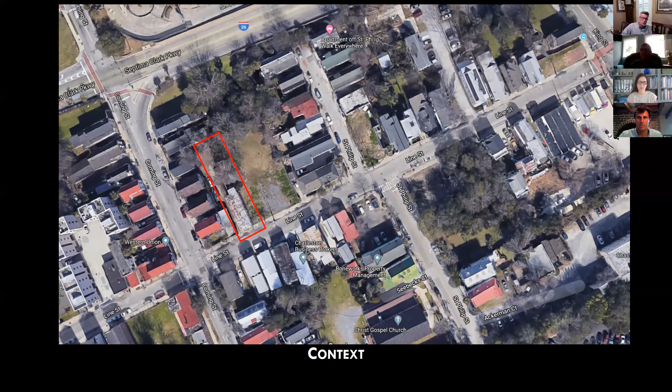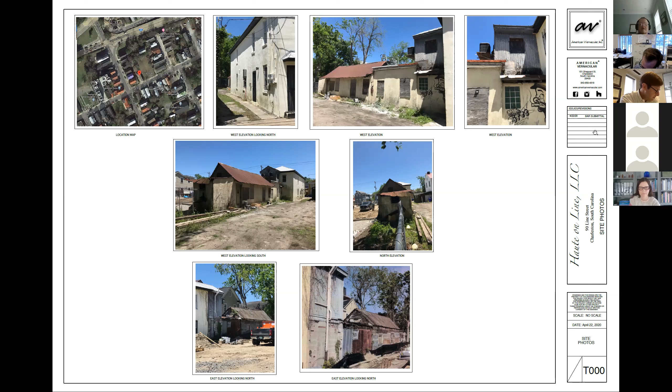And the engineer's report estimates no major salvage of materials in any structures if renovated. And the property is in the X flood zone, so it doesn't require any elevation. We're recommending retaining building C and approval of demolition of all the buildings except the original house on the street. We also require staff review on site with the owner and contractor to determine the extent of material removal of buildings to remain.

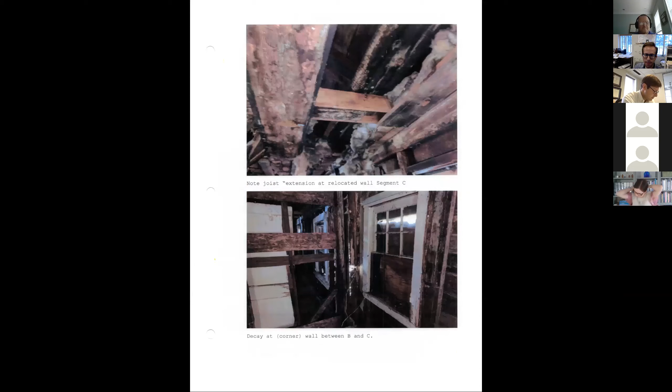Thank you. I had a hard time hearing most of it, unfortunately, I don't know whether it's me or what, but I think I got the gist of it. So if you don't mind, just repeating that last section. So I think what you said was that you recommend approval of demolition of every section except for C, which is that gable section, and obviously not the front house, which we're not asking for. And then staff review on site of how much of the material could be salvaged or not?

Yes, that's correct. Yeah, and so just back to section C again, because I do think that that's where we all are sort of focused, as well we should. You know, the salvageable material there has been greatly diminished by the fact that stucco was applied to the building. The original roofing material is not there, at least on the west side. On the east side, we could see that the old wood shingle was underneath that roofing material, which has been replaced. And so, I think, again, I'm just reacting to what you're saying, but while I would love to save that little building, I just don't think there's a lot in there that can be used or saved.

And maybe Russell might say something else to that as well. Well, again, I just don't know that by the time we do any sort of contemporary renovation that we'll have any true fabric remaining in the structure at the time the construction is done.

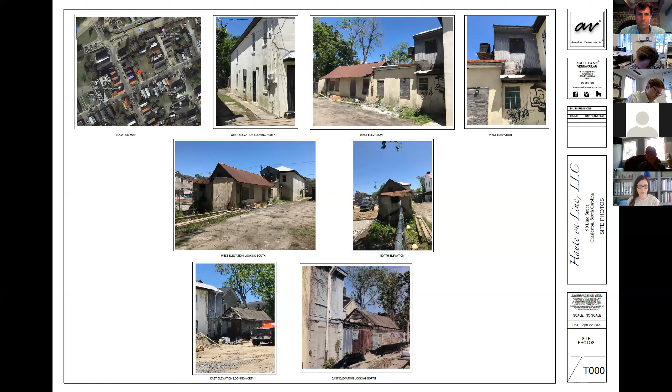I can go ahead and try to make a motion if that's okay. Go for it. Okay, I will make a motion for approval of demolition of the requested components except for what we're calling Building C, and the condition that staff meet on site and review with the owner contractor the extent of material removal of those buildings to remain.

Okay, so Julie's made a motion for approval of demolition of all requested components other than Building C, with a condition that staff meet on site to review the extent of the removed material. Did I capture that? Yes. Is there a second? Fillmore Wilson, I'll second. Seconded by Fillmore. Okay, I'm going to call the roll for the vote.

Julia? Yay in favor. Fillmore? Yay in favor. Glenn? Yay in favor. Bill? Yay in favor. Chair votes yay in favor, so the motion carries unanimously.

Next agenda item is 3 Legare Street.

This is a request for final approval for demolition of a brick wall along the driveway, demolition of a portion of the wall and iron fence at the street for a new pedestrian gate, and new garden hardscape. This is not rated in Charleston, circa 1944 to 51, in the old and historic district.

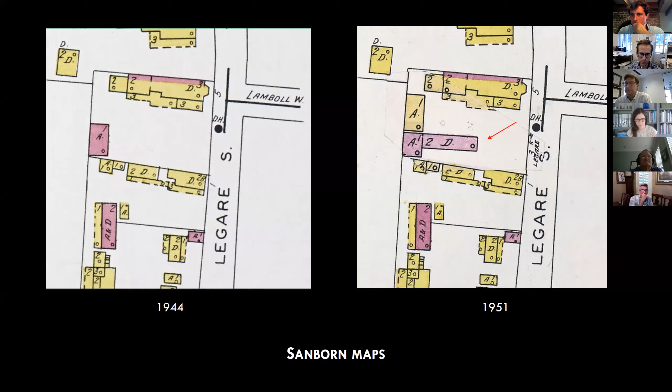And the Sanborn maps, pretty self-explanatory, between 44 and 51.

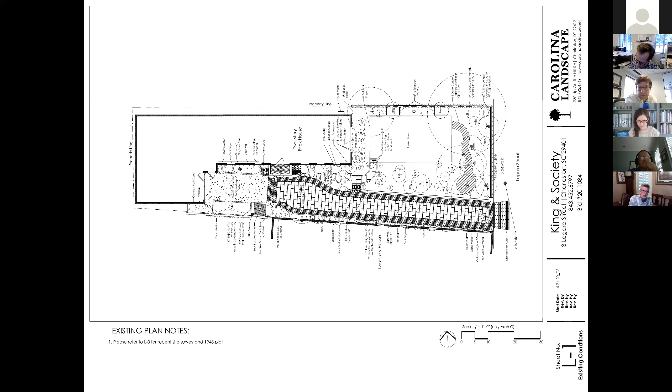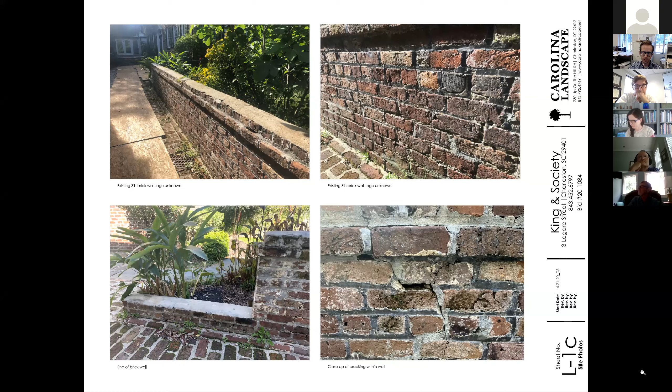You'll notice to the left, there is a raised planter, and then there's the neighboring wall. We would like to just extend the patio and finish it to be more modern and in character with the rest of the hardscapes we'd be using. But we would be keeping the structure that's existing there, just refinishing it. Next, please.

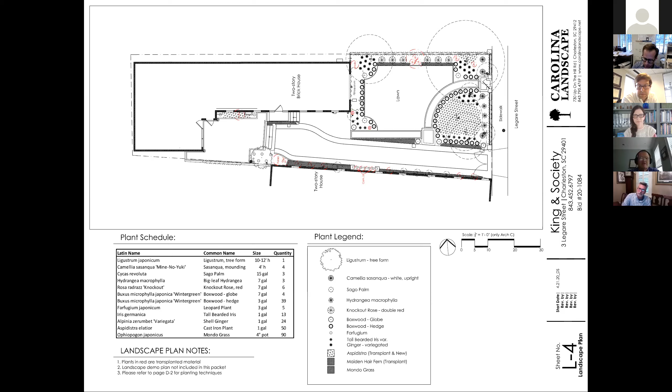There's a note about a 58-inch tall support structure. Yeah, oh, that is just wrought iron. There's nothing growing on it right now. I don't have a picture of it. It's just like a hoop type situation. It's bare right now. And you're proposing to remove that? Correct.

Okay. But we don't know what it looks like or how old it is. I think it was probably, when you look at it, it looks like it's more of a homeowner's decision to put that in, not that it's supported with a structure with like a concrete base or anything like that. And I could send a follow-up photo of it.

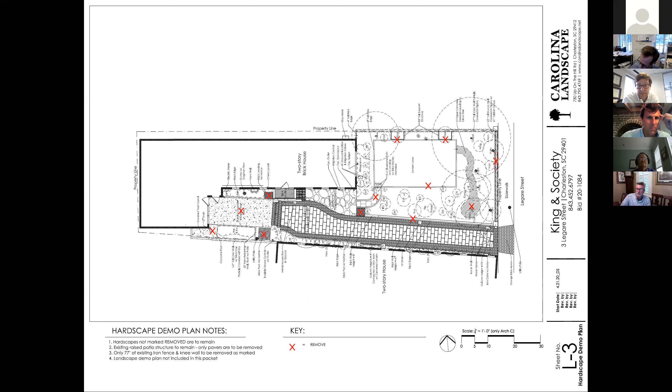Dennis, it's Glenn. I feel like it may have been visible in one of the site photos looking north, perhaps. Is that it down on the bottom right? No, that is the arch that's along the driveway, which we would be keeping. Okay, sorry.

Fillmore Wilson, I have a quick question. In the close-up photos of the ironwork, where you show one where the rail is detached from the post, is that the point that you would remove that section? Yes, exactly. That is the actual one of the sides that we'd be looking at removing.

It's not even. And so does your masonry column go back in that location? Yes. Okay, so you would lose that post as well. I would try potentially. Okay, but we could just, yeah. Is there a corresponding post at the other end of the opening, or does the fence simply

Separate there and attach to the new masonry column? No, currently there are two posts, and so it's that section that. And so the masonry columns, just looking at the elevation drawing of the new gate, it looks like the masonry columns replace those posts. Correct. Okay, thank you.

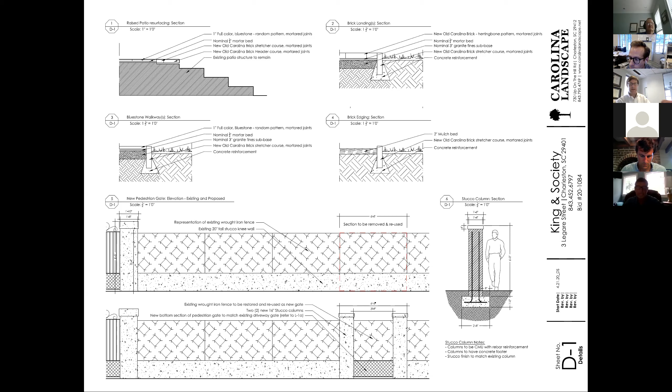Okay, and this is a request for final approval for modification to garden hardscape to include replacement of ironwork at the entry, fencing, and gate, and new lighting. It's category 3 in Charleston, circa 1797, 1840, in the old and historic district.

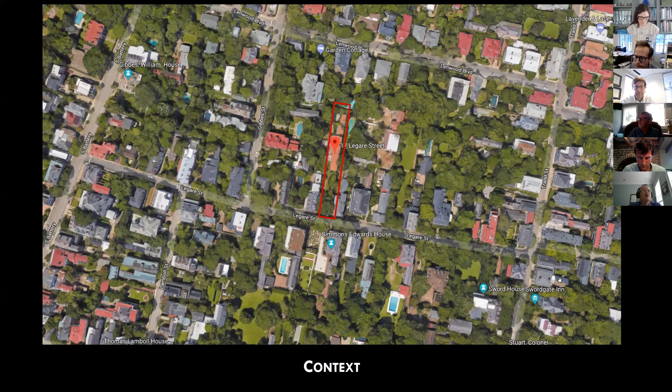Okay, so the overview here on Legare between Gibbes and Tradd, very deep property. This is a view looking from Legare right at the house in question. And then looking south on Legare with the house on the right.

There we go. Looking north on Legare, and the property's on our left in the shot.

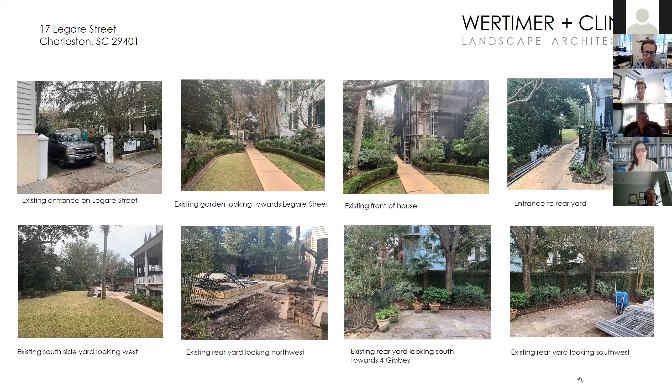These are photos of the existing entry sequence, existing stucco columns and wrought iron fencing. This is just showing the existing conditions of the site and the garden that is there presently.

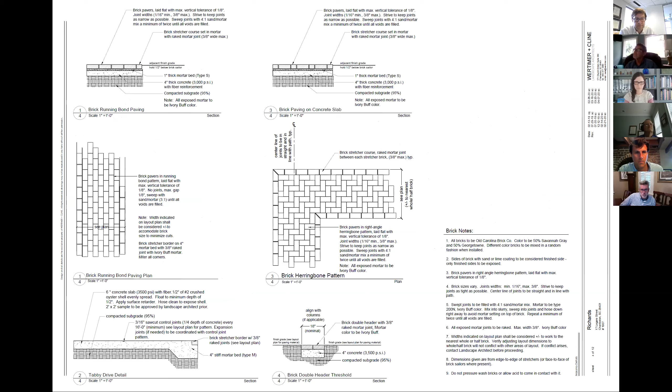These are our proposed masonry details showing the brick we're proposing, which would be Old Carolina brick. These are stone paving details, which would be towards the rear of the property. This is the proposed stucco wall that is on the north side of the property near the parking area.

This elevation shows what we are proposing for the new entry sequence at Legare Street. The existing stucco columns are 5'6", and we're proposing to raise them to 7'4", to match the existing column on the northeast side of the property, shown on the right and in the detail on the lower portion of this plan.

So the fencing would be new with similar vocabulary to what is existing now.

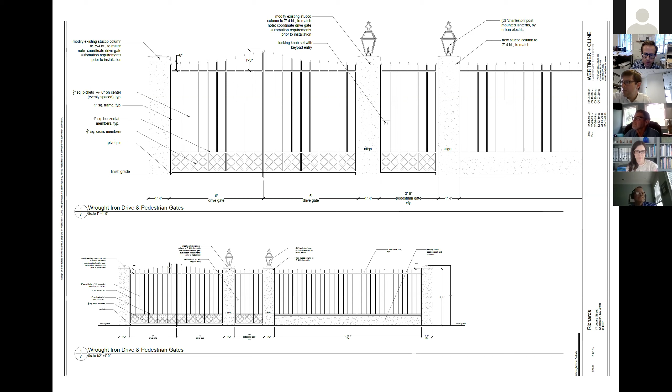Okay, and then the last question, where do the step lights occur? We don't have any step lights on the plan. Oh, the middle detail on the top? Yeah, that is just a light at the pedestrian gate that's going to be to the left of the piazza. Right there. Okay.

So how's that mounted? Where is it? I'm sorry, how is it mounted, where is it? That would be mounted to the existing columns that are adjacent, flanking that gate. Okay, thank you.

All right, so if we have no more questions, Alex, can we go to public comment? Yes, we have 1 person from the public signed up to speak.

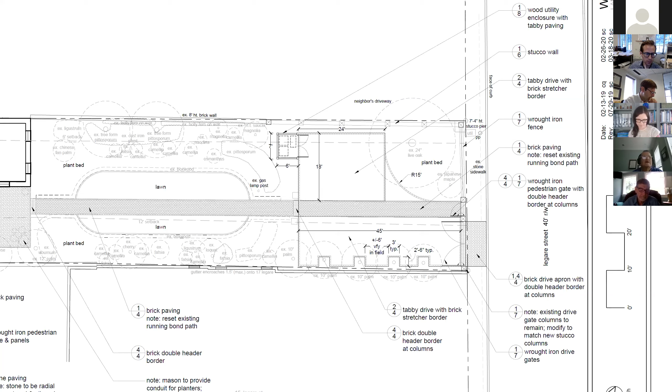Eliminate all uplights on all but grand trees. Uplighting of the live oaks at the rear of the property, however, is acceptable. The other hardscape modifications are acceptable, although any change to the right-of-way needs to be approved by the city. You've got that drive apron there, I think you're in the right-of-way. We're recommending final approval with staff conditions and final review by staff.

Okay. Cheryl, if you want to respond to any public or staff comments, you may.

Okay, sure. Alex, would you mind going to the overall site plan in the driveway area we were just looking at? So the proposed driveway is essentially the extent of it from Legare Street towards the interior of the lot. That's almost exactly the same length as the existing driveway is now. So what we were hoping to do was not encroach too much more into the existing garden. Also, where the driveway meets that brick path that is central to the garden, there are 2 existing brick columns that we were hoping to retain. So if we shifted the driveway further west, we would have to demo those. So that was one concern we had when we were placing the driveway.

As far as the trash enclosure is concerned, we can certainly flip it, it would work per plan. What we were hoping to do was keep it out of the way of that large live oak that's at that front corner. And also we thought that we could provide a little bit more screening with planting at the front side of the property where the wrought iron fencing is, since that is a little bit more transparent.

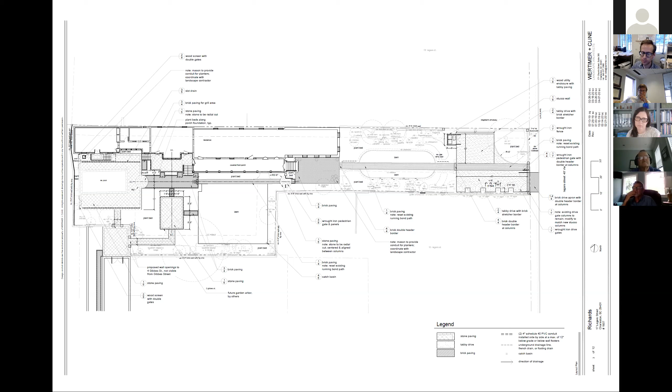Okay, thank you. So we'll go to board discussion. This is Bill.

I concur with staff's comments, but with the exception of the drive court, in light of the applicant's clarifying comments, I do believe retention of those existing columns and configuration of the existing garden panels, etc., should be retained. Otherwise, I'm in agreement with staff's comments and recommendation.

Mr. Chairman, can I just say one thing?

I would ask the applicant if it's possible, if you mirror the trash, to be in the drive area, or could the drive area get narrower to allow it to be on the east side of the drive without having to move the drive to the west?

Okay, and so we have the parking area. The intent was that you would be able to come in from Legare Street and park facing north, and the 24 feet would be comfortable for 2 cars. That was why we were considering that dimension, but we could probably narrow it some so that if we did flip the trash enclosure, we could get away from that live oak a little bit more.

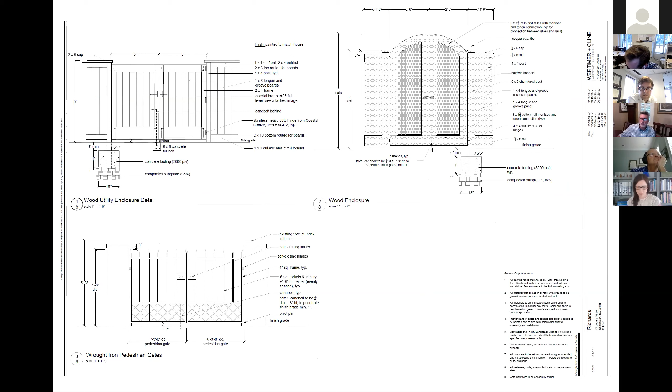My only comments would be about the trash enclosure. I think you're going to see the front or the back of it, and I'm sure the doors won't be left hanging open at this property. So I'm fine with either way, and a part of me likes it further from the street so that it is going to be shielded by landscape.

And I have to make a comment about lighting. This is such a massive, expansive property, and I don't think the public would ever have any idea if some of those subtle, sophisticated light fixtures were located at the back of the property. Personally, I wouldn't mind some of them, a modest amount, being located on the long pedestrian pathway to the house.

This is an issue of consistency though, Julia, because we have denied other people the ability to do that, and that's something we face all the time—people come in and say 'you allowed it here, why can't I do it?' We're just trying to be consistent and enforce the policies of the board. But as far as I know, it's not a policy per se, and I know it just gets ignored a lot of times, so I'm voicing a concern about that issue in general. I know that sometimes when we try to deny it, it happens anyway, and it seems like it's worth considering a little evolution of our position on that issue.

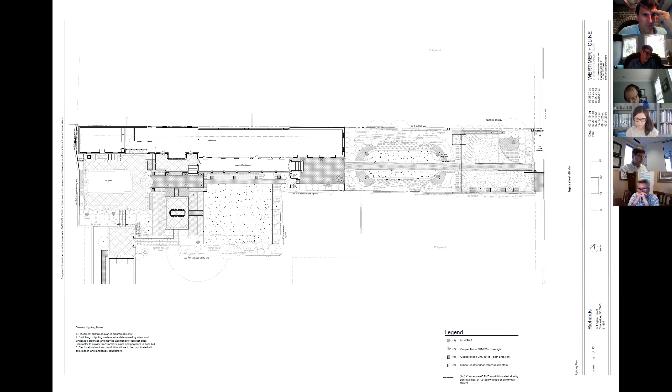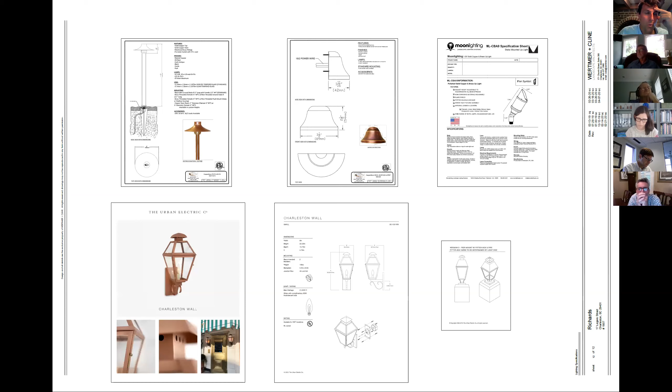Julia, I agree with you in that in this particular case, on a property of this size, I think their fixtures are appropriate and still subtle, and everything appears to be high quality. So my request would be that they get back to the city from their consultant a wattage diagram paired on the lighting plan. Perhaps they add the wattage equivalent, and I presume most of this is LED at this point, but they should add it to the plan to make sure Dennis doesn't think any of it is overkill.

Okay, Jay, if I may return to my motion and add a third board condition to provide a wattage plan to correspond to the lighting plan for staff review and final review by staff.

So just for my clarity, when we're reviewing this, you've approved all the lights that are shown, you're just asking for wattage, right? Yes, is that correct? Okay, correct. I don't think they have any hanging tree lights or anything unusual. I think she mentioned lights in the trees. Did I miss something? I don't see any fixture related to that.

Cheryl? Yeah, may I speak? Sure, please. Yeah, okay, no, I misspoke before. We don't have any fixtures that are hanging from the trees.

Thank you. Okay, all right, so Julia, let me make sure I heard you correctly. You made a motion for final approval with staff conditions 4 and 7, and board conditions to clarify the condition of the southernmost pier to avoid an impact to 15 Legare. Board condition 2, to paint the trash enclosure a recessive color to blend with the landscape. And board condition 3, to provide a wattage diagram corresponding to the lighting plan that shows a wattage equivalent with final review by staff. Correct.

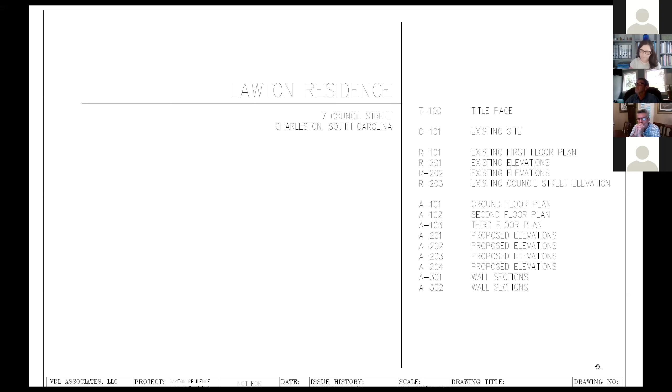Back in January 2018, we proposed raising the existing finished floor from 7 feet above mean sea level to 11 feet above. FEMA requires 13 plus the city's 1 foot. Now, 2.5 years later and with continued flooding, the owner wants to raise it up to the FEMA level, which I can't argue with much. So we're going from 7 feet up to 14 feet, 7 feet higher. This means we have 3 more feet of vertical stairs in this scheme.

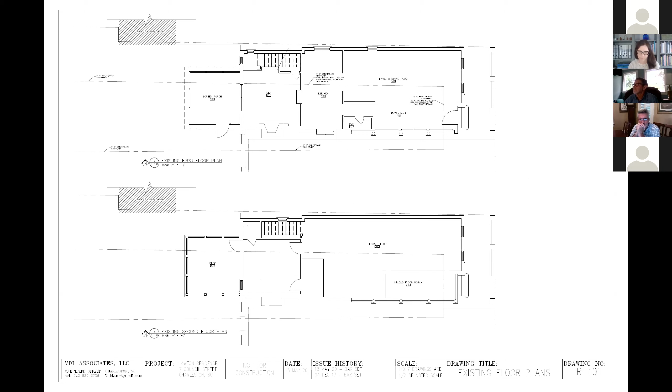These are the existing drawings, and at the top you'll see how the stairs come in, and we labeled it as an entry hall. I should have had the hall down by the powder room to the left a bit, because that's all living space, but we would turn it into a bit of a hall with our proposal. Next slide please.

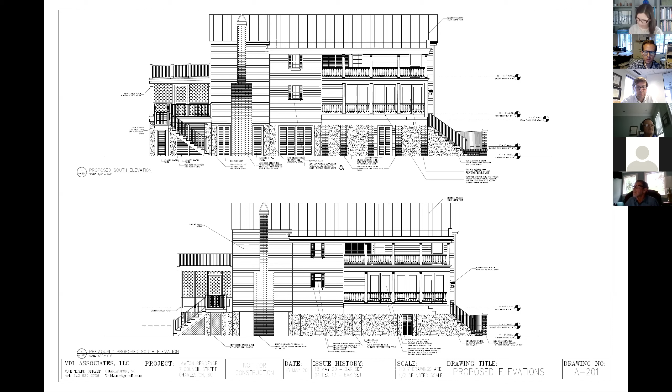Virginia, could you explain in the foundation plan how the piers under the piazza are not aligned for some reason? I was just wondering what that was for. The A100, I think. Oh, because the house isn't, it was added on three times. I mean, just under the piazza. Alex, are you able to get to that plan? It's A100. You said that, yeah. Why under the piazza are those 3 central piers proud of the 2 at the end? I just was trying to figure that out. Hunter, correct me if I'm wrong, that's the way that it is now.

Correct, that's the current situation. It just bumps out. I don't quite know why. Like I said, it was added on clearly at least 3 times and maybe 4, and I think that's when they moved that footing and the building.

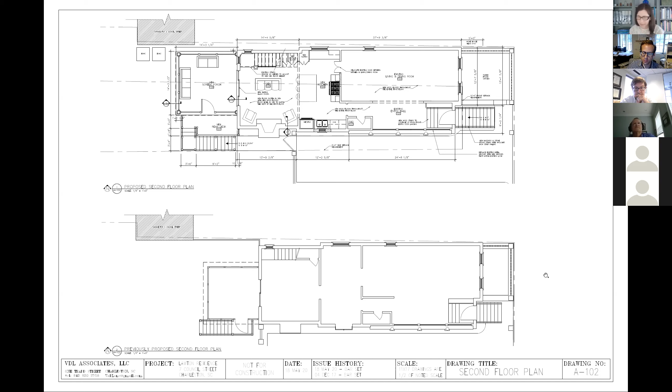But the columns above at the piazza are in alignment? Well, if you look at A102 or R100, that corner, you've got the 3 columns and then that weird corner and it recesses there to the north, the existing. I think, Hunter, speaking to answer that question too, it has to do with the brick piers that are currently there, which bump out. So we just followed that footprint. Okay, so those 3 columns are actually proud, correct. There's a photo, Julia, where you can see that.

Doesn't quite show it, but okay, we trust you're following the existing building, yeah.

And my other question was, can you just explain the purpose or the need of the deck that's outside of the screen porch? We've worked on this a good bit, Julia. The screen porch is the size of the old one, but this is the back, this is the only back door that's getting there. So if you're going in the back door and coming from your driveway, that's how you get into the kitchen. If we were to push the stairs all the way next to the screen porch, they'd have to enter from the rear of the property, which is a full 15 more feet to walk, turn around, and walk up the stairs. That was the purpose of that. Did that answer it? Okay, thank you.

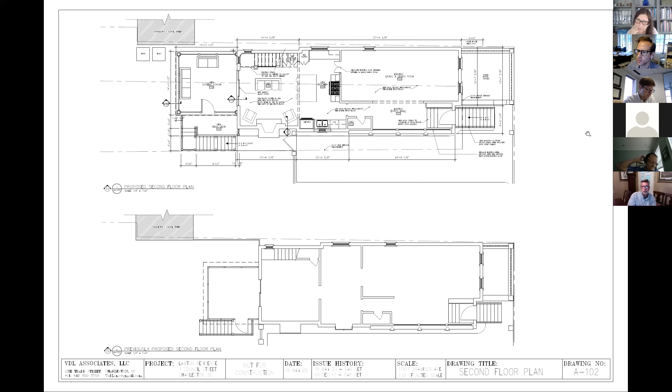Can you hear me? Yes. I was just going to mention, and then Alex, you can read the comments. It could be a variance, even if exceeding the 50% value rule, and stay with their previous proposal, and we can assist with that process if that is preferred. Alex, why don't you go ahead and read the rest of the comments, because I'm afraid I'm going to cut out here. Okay.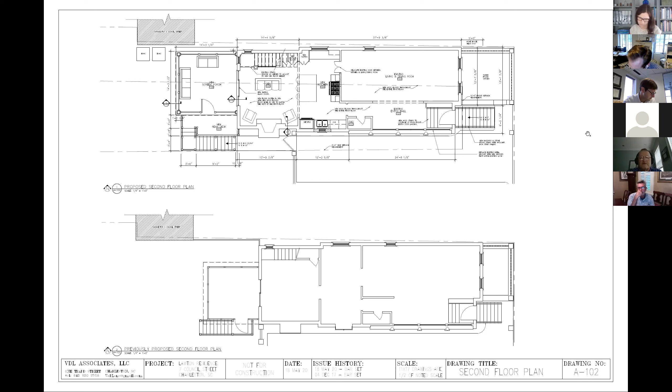The previous request was to elevate to finished floor 11 per the preliminary flood maps. This request is to elevate to finished floor 14 per the current flood maps. This changes the proportions and presents a new challenge of accommodating the entry stairs. This request also calls for the house to be set back an additional 5 feet, which changes the relationship to the streetscape and historic placement of the house on the site. However, setbacks on this street are inconsistent, and staff feels that this is acceptable to avoid a convoluted stair layout.

The stair to the new rear deck screen porch should be inset from the south facade, as it was in the previous submission, or relocated to the rear.

The elevation to finished floor results in the deck being elevated an additional 3 feet from the previous proposal, but the deck exists currently, albeit at a lower elevation. Eliminate the door in the foundation on the south elevation below the piazza. Staff is recommending preliminary approval, not enough detail information, with conditions and final review by staff.

Provide details of all new conditions.

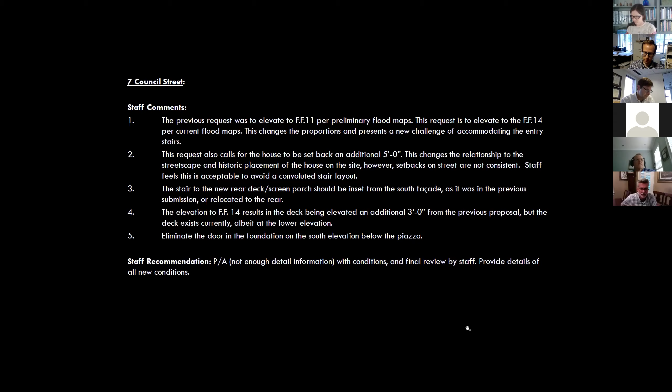Okay, thank you, we'll go to board discussion then. This is Bill. I agree with staff's comments and recommendations, and I appreciate the comments from the Preservation Society regarding detailing of the stucco foundation. I believe that can be part of the final review by staff, so I agree with staff's comments and recommendation.

Fillmore here, I agree with Bill and staff. Any other thoughts from the board? I agree as well.

Okay, somebody want to offer up a motion? I'll make a motion for preliminary approval with staff conditions noted and final review by staff. Okay, simple enough, Fillmore's made a motion. Is there a second? Second, Bill Huey. Second by Bill, all right, I'll call the roll.

Fillmore, yay. Approve, in favor, whatever our appropriate language is there. Bill, yay, in favor. Julia, yay, in favor. Glenn, yay, in favor. Chair votes yay, in favor. The motion passes unanimously. Thank you all very much. Thank you, guys.

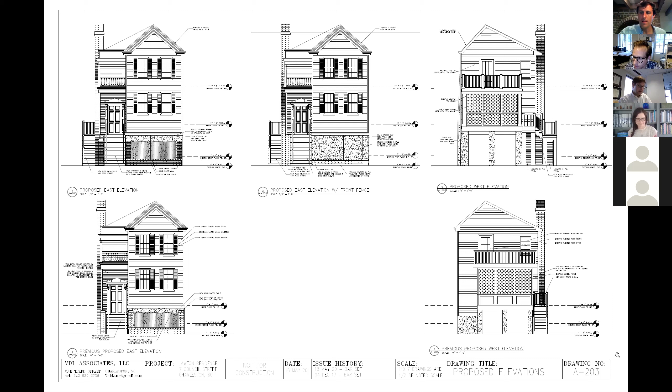Okay, next agenda item is 95 Bogard.

95 Bogard Street, requesting conceptual approval for new construction of an addition. It's category 4 in Cannonborough-Elliottborough, circa 1890s, in the old city district. Next, please.

Go ahead, Alex, it's real slow for me. Here's a context photo and aerial of the site near the corner of Bogard and Ashley. Existing site photo of the front, and showing the east side, an unusual situation where a single house form has a piazza on the east side. Context photos looking east on Bogard and looking west on Bogard.

This is the 1985 survey card. It notes the house as a tenement house modeled on the single house form with a window-door pattern of window, door, door, window, because there's no central hall. Sanborn maps from 1902 and 1944. I think this dates from, I think we said 1890s.

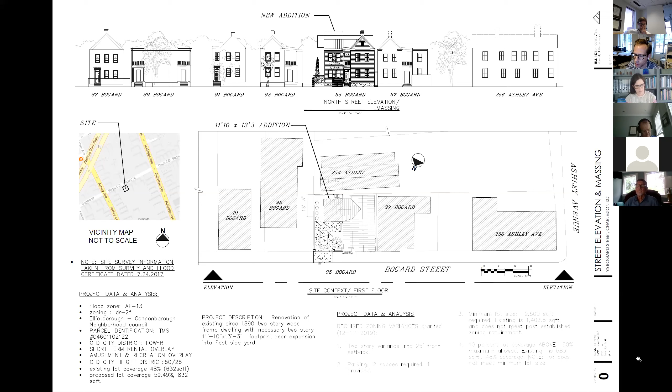I don't want to interrupt, but I think we lost one of our board members. I think we lost Glenn. Alex, I had finished anyway, if you want to throw it back to the board when you get him back. I'm here to answer any questions though. We can pause for a minute. Let's give Glenn a minute to come online, and then I'll ask him if there's any board questions you have.

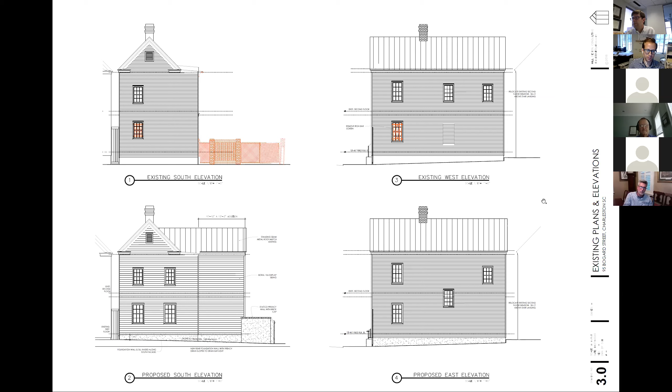Thank you, this is April Wood, Historic Charleston Foundation. Historic Charleston Foundation appreciates the effort of the applicant to rehabilitate this historic structure. However, the proposed L addition needs additional refinement before we will support it for conceptual approval. The addition needs to be further differentiated from the historic structure so that it's clear this addition is not part of the original house. With so little historic fabric remaining on this building, it will be important to keep what fabric remains. The columns closest to the addition appear to be cut in half to adjoin to the addition. It would be preferred if the columns could be retained as whole units and the addition added adjacent to the columns. HCF recommends deferral so these issues can be addressed. Thank you.

Okay, and our next speaker is Anna Catherine Carroll. You can unmute yourself. Thank you, Anna Catherine Carroll with the Preservation Society of Charleston. The Preservation Society is generally comfortable with this approach given the unique lot constraints. However, we would ask that the addition be better differentiated from the main house, primarily by lowering the height of the roof. We feel this would be best achieved by foregoing the gable roof form for a flat or hipped roof. A successful example can be seen at 53 Logan Street, a gable roofed house which features an L-shaped addition with a parapet roof line. Thank you.

Okay, Alex or Dennis, staff comments, staff recommendations?

The proposed 2-story side addition is not subordinate in scale or mass and overwhelms the existing small single house form. A more sensitive 1-story side addition may be more appropriate considering the constraints of the lot.

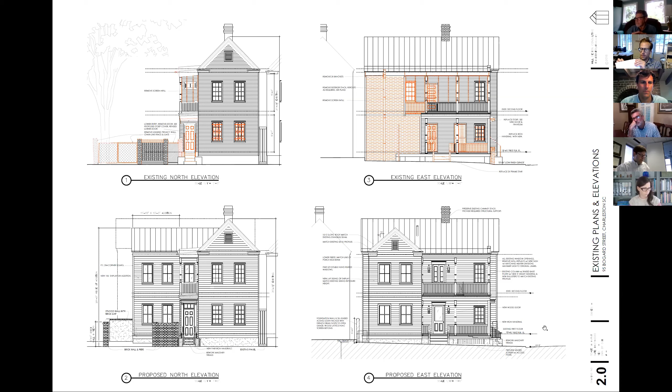Okay. Next agenda item is 34 Rose.

All right, this is a request for conceptual approval for new construction of a single-family residence in Cannonborough-Elliottborough, in the old city district. Next, please, Alex.

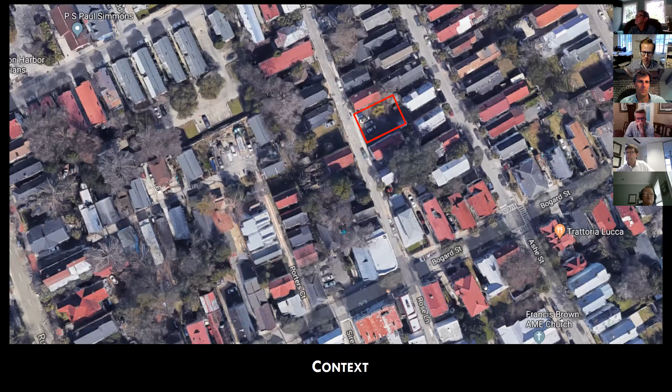And why don't you go through these, Alex? This is an aerial photo of the site showing the empty lot at 34 Rose Lane. Another aerial view. This was previously at the board on February 27th of this year, where it received conceptual approval with staff conditions.

Staff conditions 1, 2, 3, 6, 7, 9, 11, and 13, and a board condition to lower secondary eave lines below the main gable and eliminate the north dormer. Board comments included positive changes, simplify elements, small items to change to make more appropriate, pull eave down below main gable, eliminate dormer. Another board member: good direction, I think that's reconfigure massing.

Yeah, width, not entirely out of context. And another board member said adjustments can make it fit in. And I will promote the applicant.

And Ashley, you can unmute yourself and turn on your camera if you'd like. All right, thank you, can everybody hear me? Yes. All right, I'm Ashley Jennings, I'm here tonight as the architect for 34 Rose Lane.

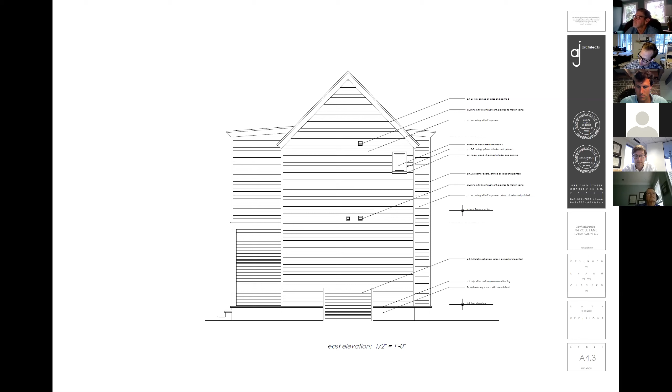This is just a comparison of the floor plans. As you can see in the evolution, version 2 to version 3, there's not much difference other than the fenestration.

Next slide, and once again, elevations, showing the differences in the elevations. Next slide. Elevations once again. Next slide.

And this is a streetscape just showing the building as proposed now in the streetscape. Once again, trying to lower that eave of the main building to bring it into scale, closer into scale with the streetscape.

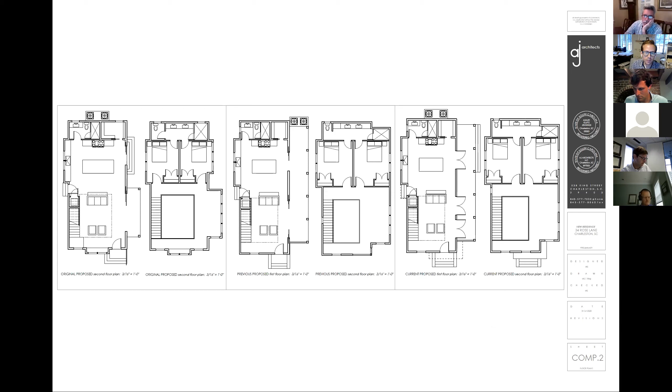That's a good question. I think that if we could successfully put a hand crimp seam metal roof there, we would. You could, Ashley, do a galvalume hand crimp, 26 gauge galvalume, and hand crimp it.

Okay, in this area. And I did ask too, because of that really low pitch on those side portions. Right. Yeah, the transition is important there.

Yeah, I think you'd almost be required to come up with more of a hand-seamed roof. I don't think that would take any other mechanical seam out of the equation at low pitch. Right.

I have one question, Ashley, that I might have asked before - forgive me, but can you explain the reasoning behind that door on the north side? I think that they wanted a side door to be able to handle trash, things like that. It's nice to have it. Thank you.

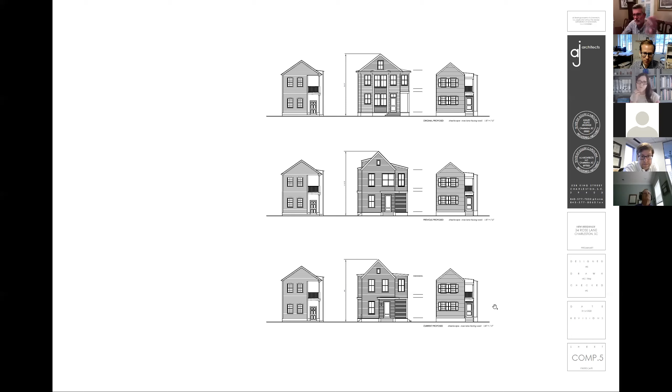Real quick, Alex, can you go to those elevations? You can go to the previous and current. Thank you. You're muted, Bill, if you're talking. Not sure if you are. Okay, I'm looking, I'm not talking. Sorry, okay, that's it.

Well, I can start if needed. I was going to thank the applicant for the summary she provided on the cover sheet - this is Julia, by the way. That's really helpful for me when I'm reviewing these things. And I'll reiterate, I've probably said it before, but I appreciate the relatively modest program of this house and the focus on graciousness and natural light, and a little bit of drama with that large opening in the second floor.

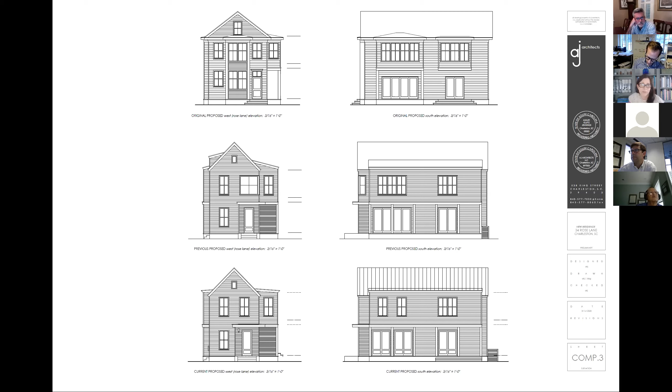I think the north side door is quite a departure from tradition, but if it's approved, I would just think it'd be nice to pull that little canopy in so that it's not wrapping around the adjacent bay, so that it's tucked into that space.

And I do feel like the evolution of this design, like Bill was looking at, it's definitely moved in a good direction. And I think at this point, in my mind, it's thoughtful without being a replica of something historic, but it can work well in the context. And to me, it's interesting and acceptable at this point.

Yeah, this is Bill. I agree with Julia. It doesn't - it says it's a new house, but it is sympathetic, which is something we were trying to look for in our previous comments. And I think a lot of effort has been made to address the comments.

Yeah, the north door is a little bit odd, and I guess I should have asked real quick to maybe check out the site plan one more time - I don't know if there was a fence or anything over on that side.

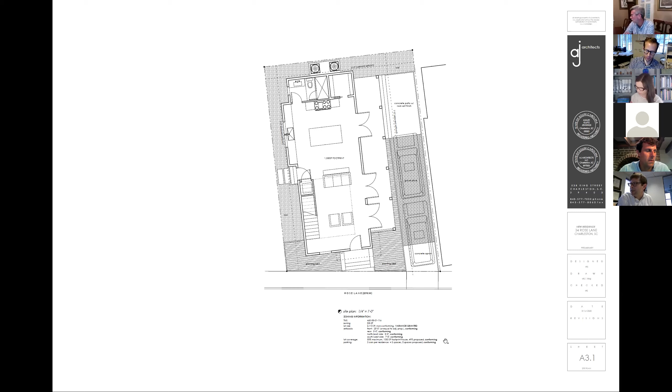So Dennis or Alex, I thought I saw we gave them conceptual approval with conditions or comments back in February. So this is seeking preliminary. Yes, this is preliminary.

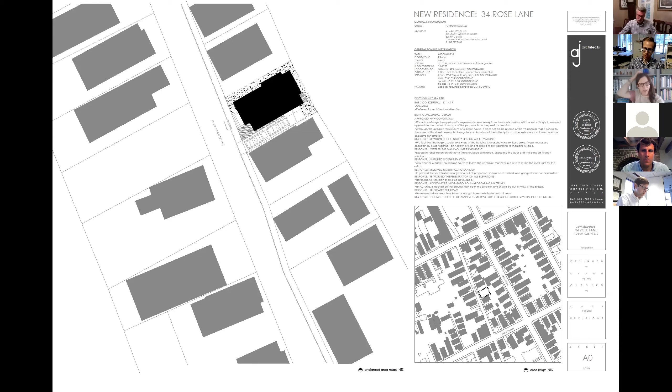Does anybody, Fillmore, unless you have any other thoughts, does anybody want to throw out a motion? Fillmore, do you want to talk? Sorry, I was muted.

No, I think I agree. I'm generally not crazy about windows muntined really tight together, but this is a new house, and it's clearly a modern house and a modern design. So I'm having less heartburn about the fenestration on the current design than I would on other ones. I agree with staff that it's a little massive for Rose Lane, but it's certainly not totally out of scale. So I think I'm in line with the rest of the board on this one.

I'd just like to ask other board members if anyone has strong feelings about the windows on the first floor being taller than the windows on the second floor. At the north side bay there's a kitchen, so those first floor windows are a good bit shorter than the ones above. But in general, at the front elevation, do you guys have any strong feelings on that point?

If this were a more traditional design, yes, I think the second floor windows should progress down, getting larger. But it's clearly a very contemporary design, and so I have a little less heartburn about it because of the nature of the design in general.

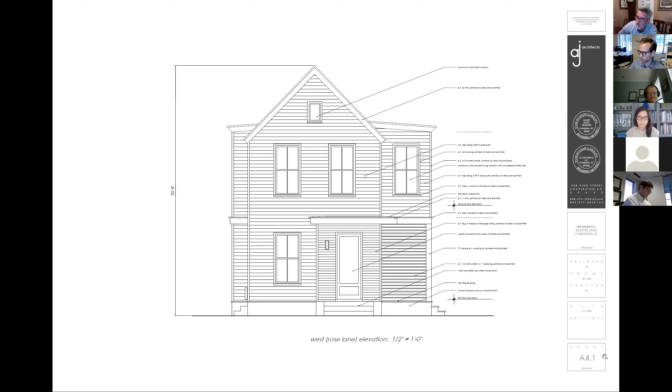Mr. Chairman, may I ask a question of Julia? Julia, I'm also now seeing those water heaters or whatever that is over there on the north side as well. I don't know the site condition, but would you entertain the idea of maybe a gate or something over there? Maybe Ashley can clarify this—is a gate warranted, or are we dealing with a gate in a void? I don't know that, but something to conceal those and maybe minimize the impact of that north door as well.

Sure. You're talking about the meters that are shown on that elevation? Yeah, the gas and electric meters is what it's called out as. I don't know where the water heaters go, but yeah, it is the gas and electric meters.

Let's add another staff condition. And I'm sorry, Julia, I guess maybe I should have asked Ashley, is a gate even possible over there? It's something we can ask.

Okay. I think that's reasonable to have a board condition to include a fence and a gate to screen the north side utility elements.

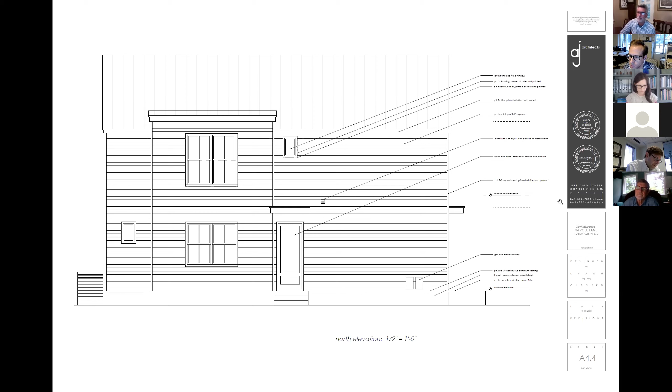And I will second whenever you call for it. Okay, so Julie's made a motion, Bill has seconded it. I'll call the vote. Julia, yay in favor. Bill, yay in favor. Fillmore, yay in favor. Yay in favor. Chair votes yay in favor, so the motion carries unanimously.

All right. Thank you. Thank you.

All right, next agenda item is 301 King Street. I think we lost Dennis during Julia's motion, so I'll go ahead and introduce. Ask for some lighting, I need someone to walk by. The light went out. I'll go ahead and introduce this one and we'll see if Dennis is able to join back in.

So this is 301 King Street, a request for appeal of staff denial for painting of existing unpainted masonry walls limited to the Liberty Street and rear elevations. The structure is not rated, is in no designated neighborhood, and the portion of this building in question was built between 1944 and 1951 and is in the old and historic district.

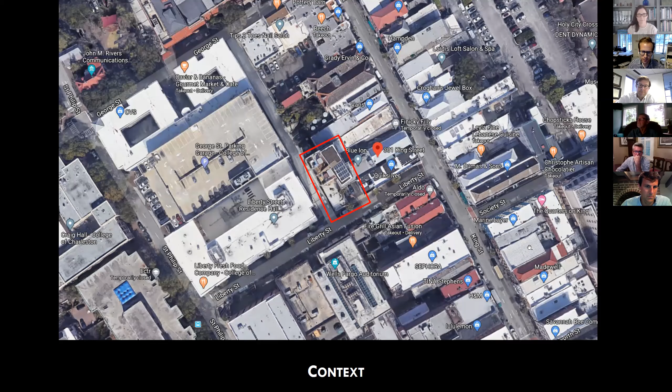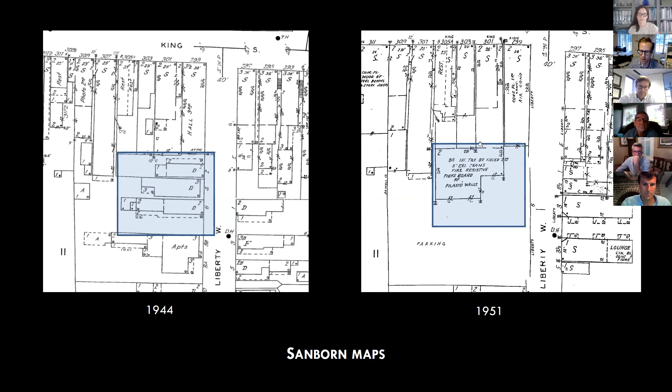Sanborn maps from 1944 and 1951 showing there was previously some houses here, and then in 1951, the building in question. And I'll find the applicant.

All right, I've promoted the applicant Matt Chambers and Rich Yesian, and you can unmute yourselves and turn on your cameras if you have one. Thanks, guys. This is Rich Yesian. I am one of the owners of the building 301.

Just a quick background, we purchased in 2007-ish. I am a co-owner with two other partners of Blue Ion, which is that second story of the older structure. That top addition, which is a condo, that is mine, that we built in 2015. That's my residence. And on the ground floor, of course, is Apple. So just some background on that building.

Alex, you did a great job of introducing it and showing the pictures. So the front part of this building, of the 2-story structure, is circa 1800s, whereas this rear part of this building, the one in question that we're looking to paint the brick of, is circa 1950s, when that was built.

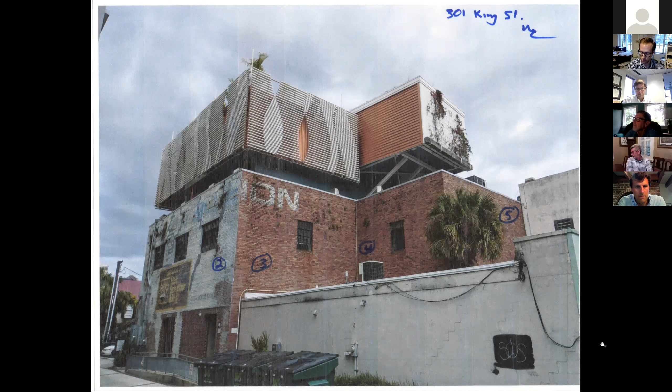Our main purpose really is to clean up the brick, seal it so that it doesn't deteriorate the building. We also feel that the brick itself is not historic in nature. It's also off of King Street and in this back alley area off of Liberty, and it's been painted before. So there's also graffiti on several sides of this brick that we'd like to cover up. So aside from the original purpose, we felt like it would upgrade the look of the property itself and the area that it's in by painting it.

I will also say that the approval of the condo that's sitting on top, my condo built in 2015, went to the BAR back in 2013 I believe, to get approval, and was overwhelmingly approved by BAR. Charleston Preservation Society and Historic Charleston were all on board with the design of the condo and the addition. One of the key things someone said, I believe on the BAR, was that the addition, being contemporary in design, was actually upgrading the overall aesthetics in that area, because there was nothing exemplary about the building itself and the surrounding buildings. And so they felt that contemporary design and new construction was actually improving all of that.

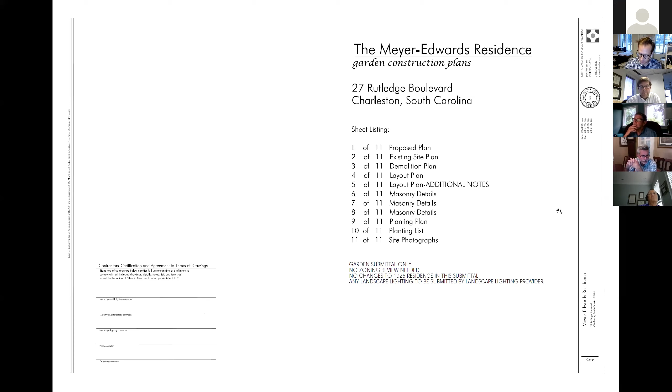We are requesting approval for a new rear garden and swimming pool with a limestone terrace around the pool. Due to past flooding, we studied the existing coping wall height and decided to slightly elevate the pool terrace to avoid floodwater in the pool, but the surrounding plant beds will all remain at the existing grade adjacent to neighboring properties. We are requesting to replace the existing iron gate with a wood gate for more privacy, as this garden is on a corner lot with high visibility.

The iron is not historic, and the stucco piers are CMU block with stucco finish. We would like to create a hidden bicycle area behind a stucco wall panel, where we need to remove the existing fence to gain access for pool construction. The submitted plan shows a gate from that bicycle area out to the sidewalk, but we are currently exploring other options to have that area open only internally to the garden. A mix of existing and new plantings will make the garden far less visible from Rutledge Boulevard.

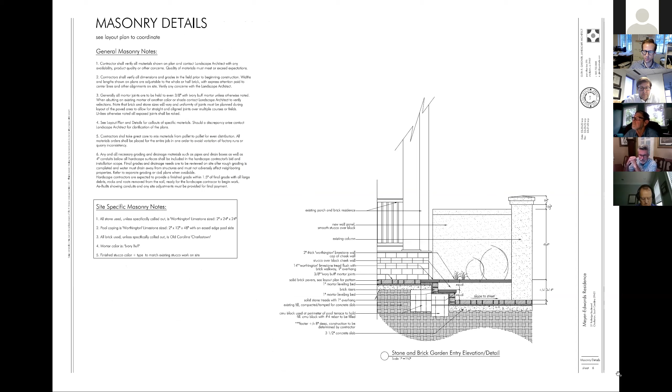The next slide. These are getting into our masonry details of how it would be built. The next slide.

These are more masonry details. This is a detail of a proposed wall panel that would be on axis with the wooden gateway, the access from Rutledge Boulevard, and the equipment for lighting and irrigation controls. We have planned for those to be on the back of it.

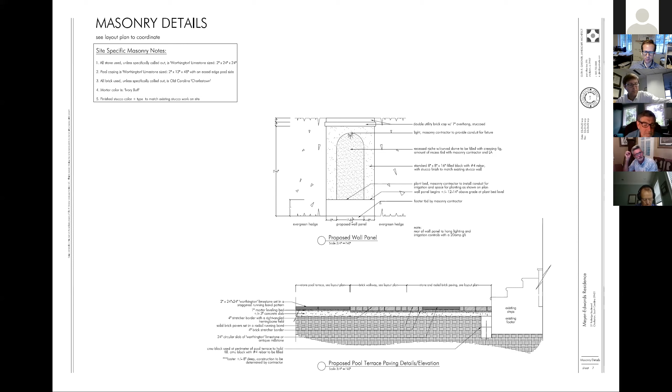Yes, where you're pointing, exactly. Yes.

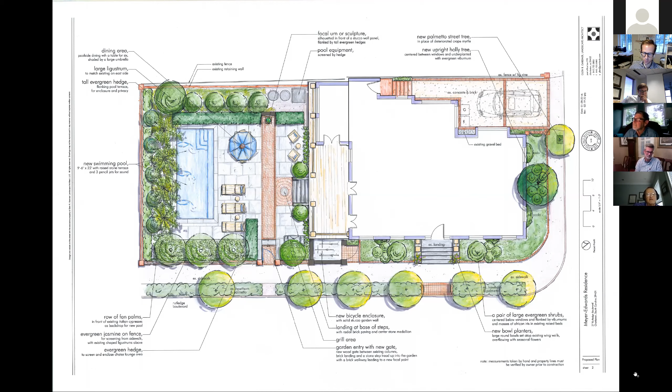Provide a permanent screen for the pool equipment and submit details. Provide details of any proposed landscape lighting if proposed. The other hardscape modifications are acceptable, although any changes to the right-of-way need to be approved by the city. We're recommending final approval with staff conditions and final review by staff.

Okay, thanks, Dennis. Elizabeth, you want to say anything in response to staff recommendations? We are already looking into having the bike storage location moved internally to the site, so that is totally doable. And the screening of the pool equipment hopefully would happen with the evergreen hedge. We were thinking the other sides also need to be screened from the neighbor's property. Okay, we can do that as well.

All right, thank you. So let's go to board discussion. This is Bill - I think it's a nice plan. I do agree with staff's comments, and I would support staff's comments and recommendation. This Fillmore, likewise. All right, Julie, any other thoughts?

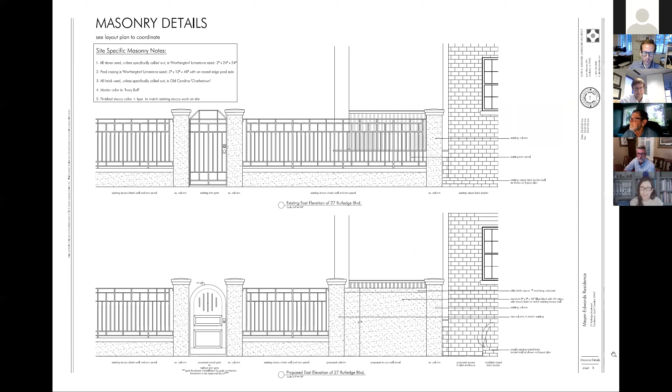No, I agree. And I just thought of a late breaking question for Elizabeth - I'm just curious, I see the trash and recycling bins just in the driveway. Is that just where they are now and that's how they deal with it? Yes, that is where they are now, just sitting there. I don't have anything else to add.

Someone want to make a motion? Okay, I'll make a motion for final approval with staff conditions and final review by staff. Okay, Julie's made a motion. Is there a second? This is Bill, I'll second. Okay, I'm going to call the roll.

Simple enough - Julie? Yay in favor. Bill? Yay in favor. Glenn is recused. Fillmore? Yay in favor. Chair votes yay in favor, so the motion passes unanimously.

All right, next agenda item is 50 Lawrence. This is requesting final approval for new garden hardscape, swimming pool, and wood gate. It's a category 3 at Ansonborough, circa 1807 to 1808, in the Old and Historic District. Next, please.

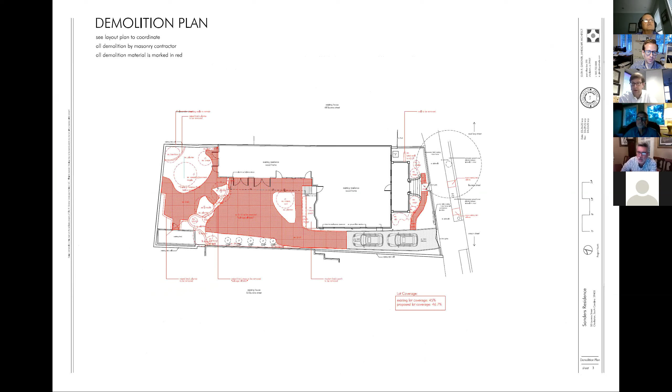Does anybody have questions for Elizabeth right now? Yeah, this is Bill. So Elizabeth, right now you mentioned the rear of the property is raised. And it looks like the rear part of the building still communicates to a raised grade. Where are the steps? I'm just making sure I'm reading this right.

Yeah, I was wondering in your new plan, is that grade raised in your new plan as well, all around the pool? So the step up in this area is where the stone terrace around the pool is. So that is where you would step up.

Okay, but isn't it, what, 3 steps up existing? In other words, I'm just trying to figure out, is the new level back here around the pool and everything all raised comparably to where it's existing raised? The steps are not full step height. They are like 2.5 inches a piece. So I think that will be looked at, but it will meet existing door thresholds.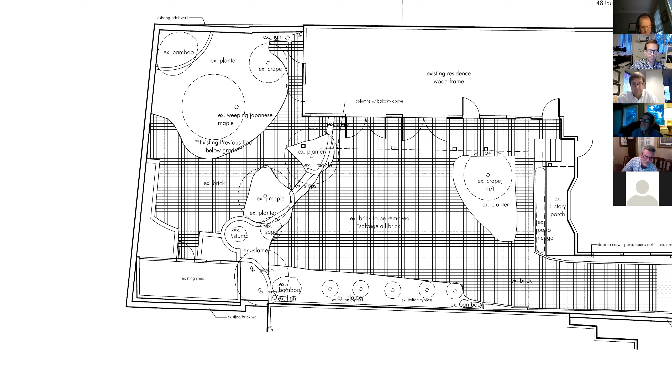And then we're leaving room where we expand. If you go back to the proposed plan, there is a space behind the chaise lounges where we are not touching the house. So basically, there's no location where there's a new raised grade adjacent to existing perimeter walls. Yeah, correct. Thank you. Yes.

Elizabeth, is there any landscaping lighting proposed? If our clients want to do it, we or the landscape contractor or the lighting contractors will submit it for review. But they have not decided yet.

Any other questions? Is there public comment, Alex? No public comment. Okay, how about staff recommendation? All right.

The covered structure is not part of the submission, as we clarified. Submit details of this structure separately for review. The one-story deck and porch at the rear that is proposed for removal is not visible from the public right-of-way and not historic. Provide permanent screening for the existing HVAC unit at the south elevation beside the porch, or leave the existing screen wall in place. Confirm with zoning the allowable height of the iron arbors. Provide details of any proposed landscape lighting, if in fact any is proposed. And the other hardscape modifications are acceptable and minimally visible. With that, we're recommending final approval with conditions noted and final review by staff.

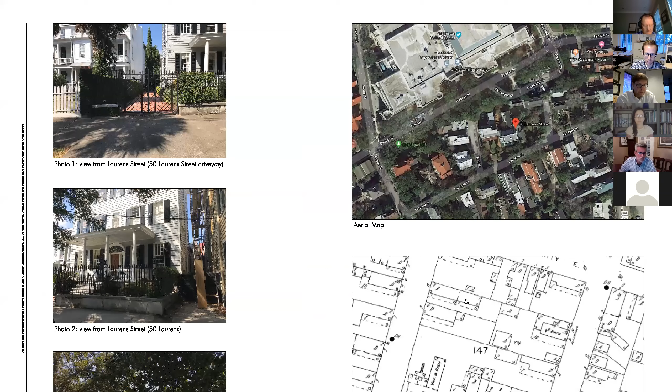Okay, jump the gun. Board discussion. This is Julia, and I think it's very nice, and I think staff's comments make sense. So I have nothing to add.

Yeah, this is Bill. I agree, and obviously the current landscape plan's obsolete with the stump — the whole thing was designed around, I guess, a tree at one point. It's now a stump, so it's a well-conceived plan. And I agree with staff's comments. Yeah, I agree with staff.

Okay, anybody got a motion? Fillmore, you were getting ready to make a motion, weren't you? Yeah, somebody, yeah. Attaboy, Jay.

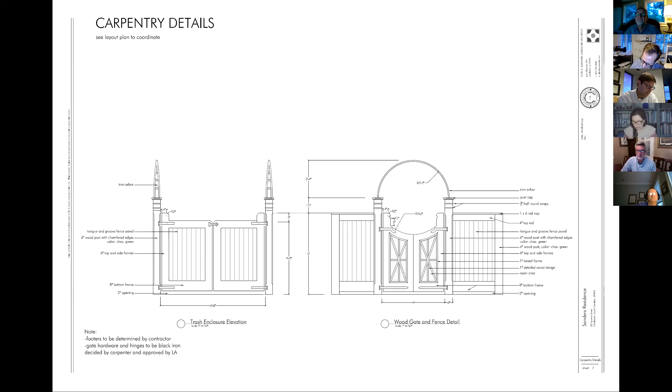Okay, I'll make a motion for final approval with staff conditions noted and final review by staff. All right, Fillmore's made a motion. Is there a second? Second by Julia. All right, I'm gonna call the roll. Fillmore, aye in favor. Julia, aye in favor. Bill, aye in favor. Chair votes aye in favor. Motion passes unanimously.

All right, next agenda item is 114 Tradd Street. They're requesting final approval for removal of an existing hardscape with salvage of brick, new stone and brick hardscape, blue stone coping at the pool, wood gate and garbage enclosure, and removal of selected ground level railing for access to the piazza. This is a category 3 in Charleston, pre-1888 and the old and historic district.

And then inspection of the intersection of Legare and Tradd looking west. And the '73 inventory card, so we know that the change to the piazza occurred before '73. And then the Phoenix fire insurance map of August 2nd, 1888. Sanborn maps from 1888 and 1902 that show some evolution for some of the dependencies. Go ahead, Alex. And then with that, I'll turn it over to the applicant for their presentation.

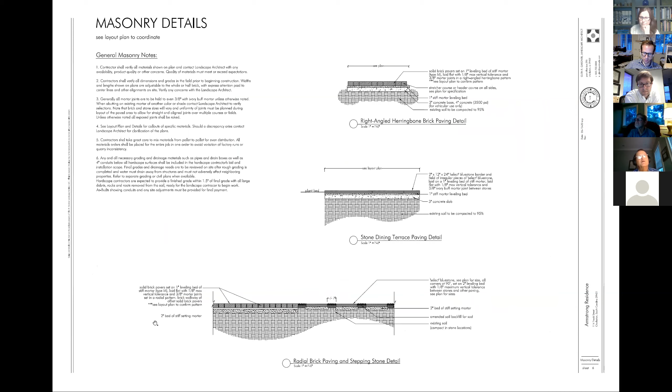I think what we're talking about here is removing sections of railings to allow egress and ingress to vehicles. I don't know that we need to go there to assess that. It's clearly tight. And I think we need to decide: is preservation of the balustrade more important than access to and from the cars, or can access take priority, without actually having to take a site visit, I believe.

I agree, Dennis, I think it's all pretty evident from the photographs. And I am not sure which way I'm leaning. I'm curious to hear what other board members think. You know, I think I'm leaning Julia's way. I used to rent a house down here, and I remember that driveway being significantly tighter than most. So I think I'm leaning towards finding one of the balustrades to remove, to the limited extent possible, to access a wider vehicle like that. So maybe not as much as proposed, and I don't know whether you do it in the front or the back, but finding one perhaps.

And I don't know if this helps, but the railings are not shown on the back of the porch facing the garden because they are not there. So where the grill is, that porch does not have any railings.

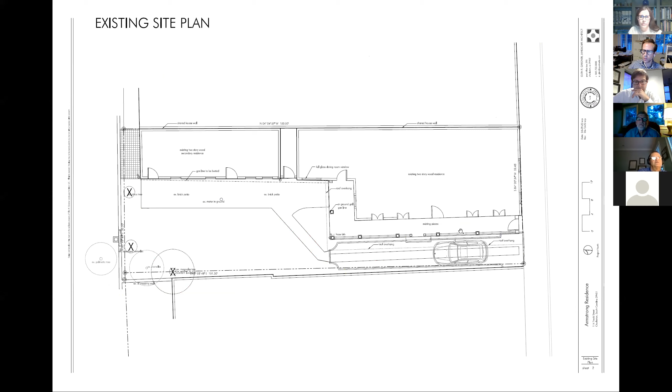You go to the elevation, Alex. To which, the elevation existing or proposed photo? Either. No, the drawing. I don't think we have an elevation photo. We have photos, or an elevation drawing. I thought there was a drawing that showed it. I guess it was the plan drawing that showed the extent of removal proposed.

I'm looking at some listing photographs online, which are really helpful. So right now, Elizabeth, there are 3 sections proposed to be removed. Am I seeing that? Yes. Okay, 2 full sections, and then the section in the center is not a full section, it has an opening in it right now.

Would it work if just the center section with the opening were removed? That's what I was looking at, Dennis. It seems like you want to keep a couple of sections closer to the street, and the one in the middle seems more logical than the others. I think the one in the middle is logical as it's a tight space.

Currently, it's a really tight space. Looks like it was filled in or cut for someone to access the driveway when the driveway was put in.

I think it would be really useful to have the center one gone and keep the first 2 and the last section. I think that would be really great, make it easy for them to use the space. The funny thing is to have just one short section of balustrade remaining at the rear there.

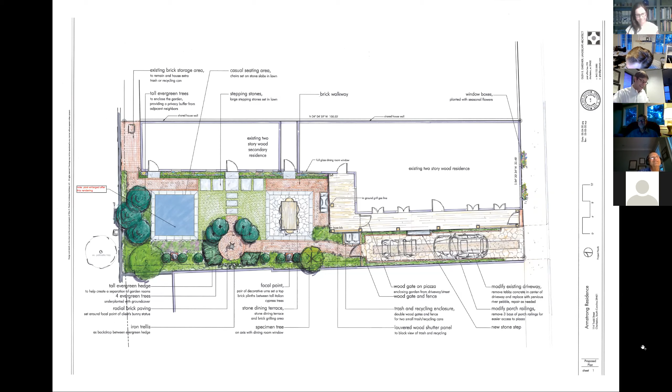Now I'm going to recuse myself. Okay, let's get everybody back and say goodbye to Julia. Good night, Julia.

Okay, y'all broke out, so am I good? Yes, I'm sorry, yes you're good. I lost y'all when y'all voted. So what was the decision? You got what you wanted, only the middle bay. Okay, thank you. Okay.

Bye. 24 Humphreys Court. Okay, requesting final approval for new construction of single-family affordable housing in Cannonborough-Elliottborough and the Old City District. Next, please.

So here we are in Humphreys Court, which is a very narrow court off of Rutledge. Next, please. An existing site photo of the location of the site. Go ahead, Alex. And with that, I'll turn it over to the applicant for their presentation. Go ahead, Aaron.

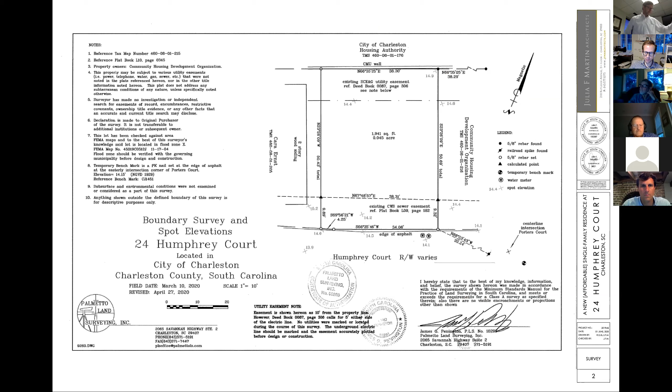Next slide, please. According to the Sanborn maps, there have been no residential structures on this lot for at least 100 years, so our design isn't inspired by anything that was here, but you'll see it does attempt to reference the traditional wood frame vernacular and character typical of this neighborhood.

Our proposed site plan is on the right, and again, because of those easements, we're pushed back on the lot in sort of an atypical way, but the trade-off is a compact footprint that allows for a really generous amount of green space. Next slide, please.

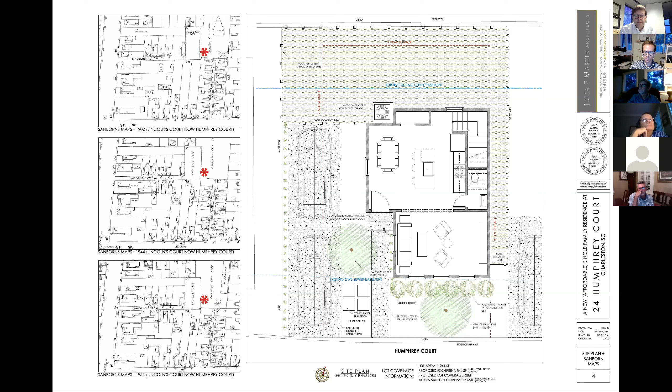This is the first and second floor plan. It's a fairly modest two-bedroom house, and we've moved away from the typical single house layout of the earlier design, but it's really an efficient plan that provides a simple but we think interesting massing at the exterior. Next slide, please.

Moving to the exterior, we have a two-story, three-bay main volume with a secondary minor volume on the west side. Not too dissimilar to the traditional single house form, but pulling the entry a little further back, we're able to break down the mass and also clearly read as something more contemporary.

Materials are a 4-inch exposure cementitious lap siding, 2/2 aluminum clad SDL windows with grills at the exterior and spacer bar in between the glass.

And then of course, because of our elevation here, we have a relatively minimal foundation with just a traditional 3-coat smooth stucco finish. In terms of colors, we're kind of imagining a light base color on the siding of the main volume, but then a single strong trim color like a terracotta red or something that would be used at all the trim, fascia, window sashes, and then also the minor volume siding to just provide a nice contrast throughout.

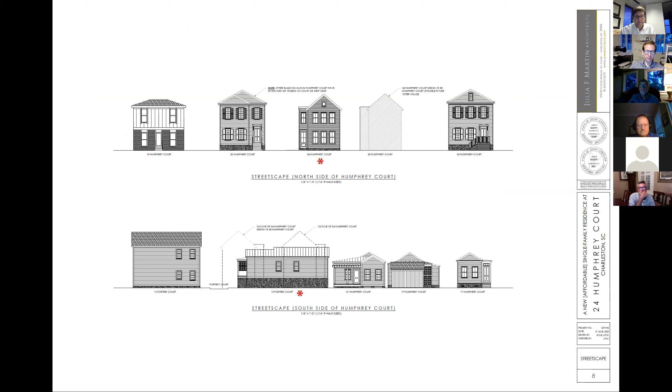Next slide, please. These are our proposed streetscapes, which again have a lot of variety already, but we're certainly in keeping with the other two-story buildings, which are the majority on this street. Next slide.

And then we have our final details here at the end, which I won't go through in detail, but if you have any questions, I'd be happy to answer them. And that is all I have.

Okay, does anybody have questions for Aaron right now?

All right, so Alex, is there any public comment? I have a letter right here. All we have is that letter.

Okay, I'll read it. Scott Watson of 17 Humphrey Court writes that his family resides at 17 Humphrey Court, and a house was originally approved and constructed in 2013 with a subsequent addition completed in 2019. We're fully supportive of the proposed project and the potential future sister house on the adjacent parcel presented by Ms. Martin on behalf of the Episcopal Diocese Community Housing Development Organization. The design is respectful of the scale of other residences on the court, as well considered in its detail and specification of materials, and when completed will further advance the potential to create a logical and pleasing streetscape on Humphrey Court, more fully connecting to Porter's Court. It also, unlike some projects approved in recent years on Porter's Court, provides for off-street parking for the future residents and respects reasonable setbacks and height limits. We very much feel this building would be a great addition to our neighborhood, and we strongly support the application presently before the BARS.

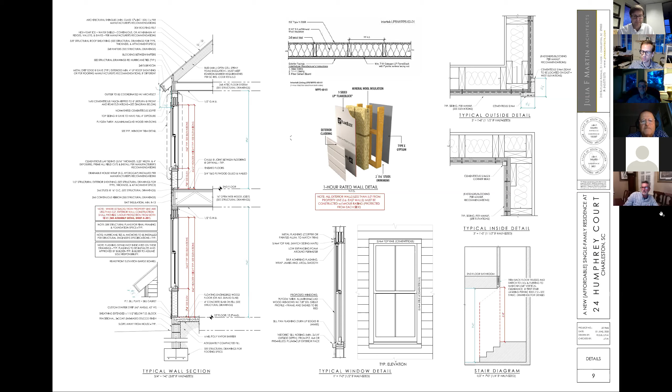So, Alex, how about staff recommendation? Okay, height, scale, and mass are acceptable for the streetscape. The proportions are horizontal with the 3-bay front facade, but not overly objectionable. The geometry of the enclosure is better on the west side than the previous iteration. Our first instinct is to say we'd like to see 2 bays of windows versus 3, but we understand the need for a window in the bathroom, so we're okay with it. We're recommending final approval and ask that the applicant submit the color palette for staff review.

Okay. Aaron, do you want to react to public comment or staff comments? No, thank you. All right. Is there any board discussion? This is Bill, I agree with staff's comments and recommendation. So you're Glenn, I do as well. Fillmore.

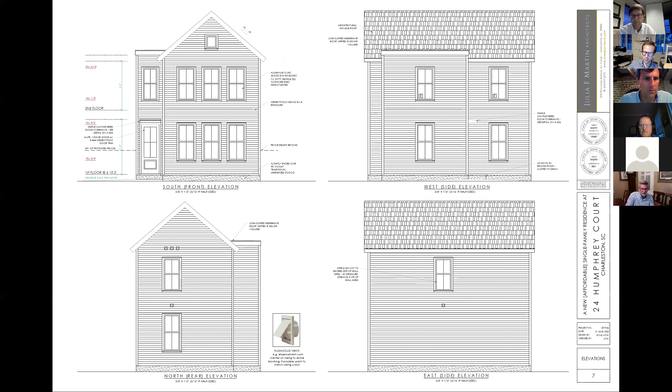Okay, Glenn, you want to make a motion? Are you able to scroll back over, Alex, to the staff? Glenn, it's not on there, but I think staff also said. Yeah, I added, submit color palette for staff review. I'll make a motion for final approval with staff review of a fourth comment about the color palette for review. Okay, so Glenn's made a motion for final approval with, I guess, a board condition to provide color palette for staff review. Is there a second?

Mr. Chairman, may I ask a point of order? Yep. Was that motion for final approval with staff's comments and the fourth comment? Correct. Well, it was just final approval with an additional comment of submit color palette for staff review, because the other comments, that was part of the recommendation. Understood, yeah, those aren't really staff comments, right? Right, there weren't really any, I didn't feel like there was anything to. Understood, I'm sorry. There are no conditions other than what I added to the recommendation. Sorry for the confusion there. I'm sorry, thank you. No, we're good.